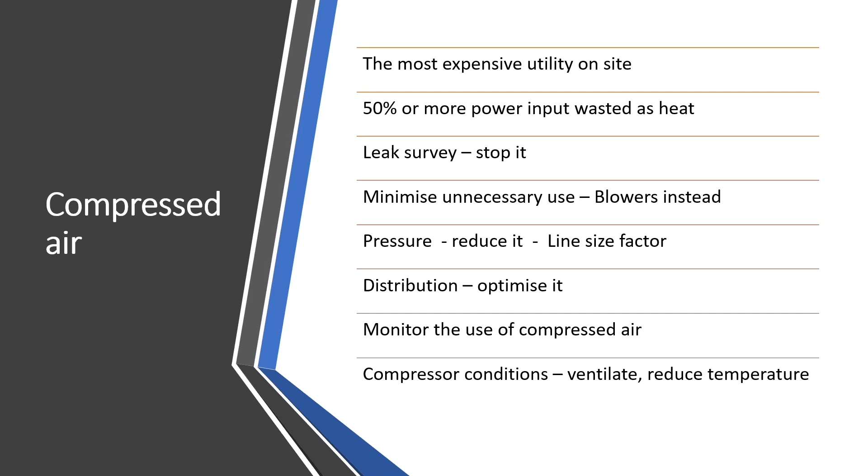And lastly on this compressor, and a little sort of overlooked fact, is that the volumetric efficiency of a compressor, at least positive displacement, so a screw or a piston compressor, will change dramatically with air temperature. So if you draw in air at high temperature, then the performance goes down, and 4 degrees C roughly will equate to about 1% reduction in performance. The waste heat from the compressor could, of course, be used to heat buildings.

And heat use in buildings for space heating and so on, there are some obvious things that you can do to save money. Reduce the temperature by 1, 2 degrees. A human cannot detect an air temperature change of less than 2 degrees. So you can safely go from 21 to 19 and nobody will be any the wiser. But that will save you a significant amount of fuel during the year. Insulate the building, the most obvious answer, and that's well known about.

But with a well-insulated building, it is a pointless exercise if the building is not well sealed. In other words, air infiltration or exfiltration can permeate the building, removing the heat that you've put into it. And sealing the building is as important now, if not more so, than insulating the building. And by that I mean window frames, door frames, plug sockets, pattress boxes, sealing around skirting, every conceivable gap or entry that allows air into the building.

Gas-fired boilers, now far more efficient than anything else. A premix modular gas condensing boiler can have a gross efficiency close on 95 or even greater than 95%. However, all of that is worthless unless you control the hours. And in controlling the hours, you really ought to be optimizing and compensating the control. Again, very easy with modern boilers.

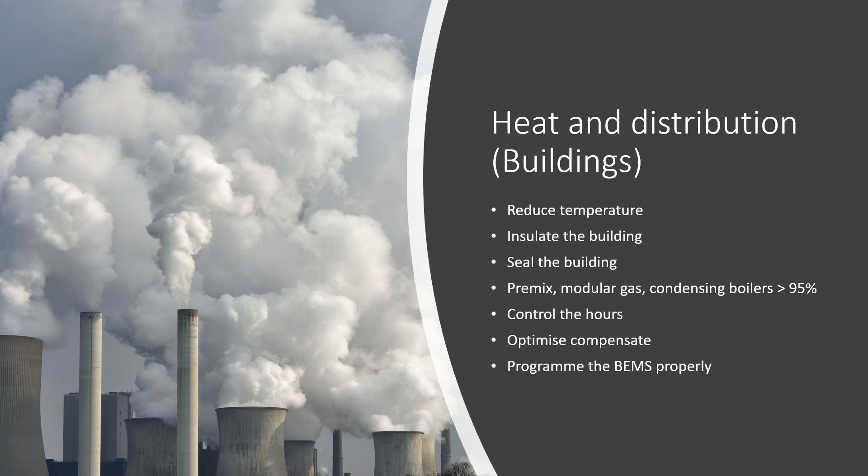Lastly, if you have a BEMS, a building energy management system, then please ensure that it's properly used. It's a very expensive time switch, but in most cases, that's what a BEMS simply is. It's used as a time switch when it can do so much more.

Looking briefly at heat and hot water and steam distribution, again, minimum temperature and pressure for generation, insulate the pipework and fittings. That's the often overlooked item with huge savings to be had there normally. Recover the condensate under all circumstances. If the condensate you feel is contaminated or has a high conductivity, then put it through a local plate heat exchanger, at least recover the heat from it. Obviously it's better if you can actually recover the liquid, the actual treated condensate.

Never generate hot water with steam. You're probably looking at an overall efficiency of about 50% there, when you can do it with direct fired gas boilers at something well over 90, as I said. Process heat: reduce, recover, reuse. There will be opportunities for process heat recovery in almost every circumstance. Compressor heat recovery is a good example. And where that's not possible, then we might be looking at integrated process heat recovery. And a good example of that is the use of an economizer in flue gas heat recovery.

Overall, with heating and heat distribution systems, things like insulating pipework and fittings have definitely got a payback of less than 1 year, and other more complex process heat recoveries are typically about 3 years. But generally speaking, there's somewhere between 15 and 20% savings potential in most heat distribution systems or process heating systems.

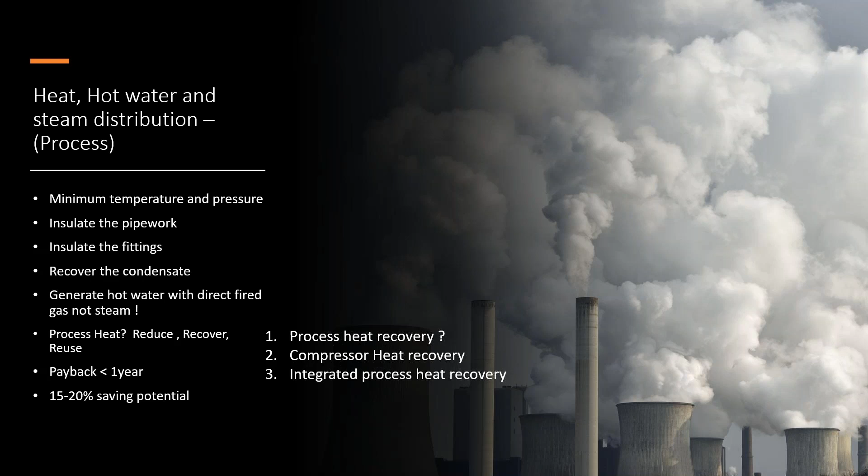Lighting, very quickly touch on that. There is an LED solution for every application. LED lighting does need careful design, and the critical bit here is getting the lux level at the work plane right. Lux is the lumens per meter squared at the work plane of, let's say, 0.9 meters above the floor.

You have to consider the lumen output, the ratio of the light output that is going to go to the place that you need it, the downward light output ratio, the color rendition. LEDs have very dichroic output unless the LEDs themselves are coated. So fruit and vegetables may look a very different color under an LED light than they do under a daylight fluorescent.

And the luminous intensity and the directionality. Now, luminous intensity: the LED has got a very small area but a very high luminous intensity. So if you look at an LED torch, for example, it looks incredibly bright, but actually when you shine it to see where you're going, you find it's about as much use as an old candle. And really, you've got to be very careful with LED design to get it right. And that's not something that every supplier understands.

Whatever you do, use an employer's risk assessment. Don't be having inappropriate lighting or color rendition or even control switching in things like switch rooms or stairwells, because if there's an accident, you'll get sued for not having established as an employer a safe system of work.

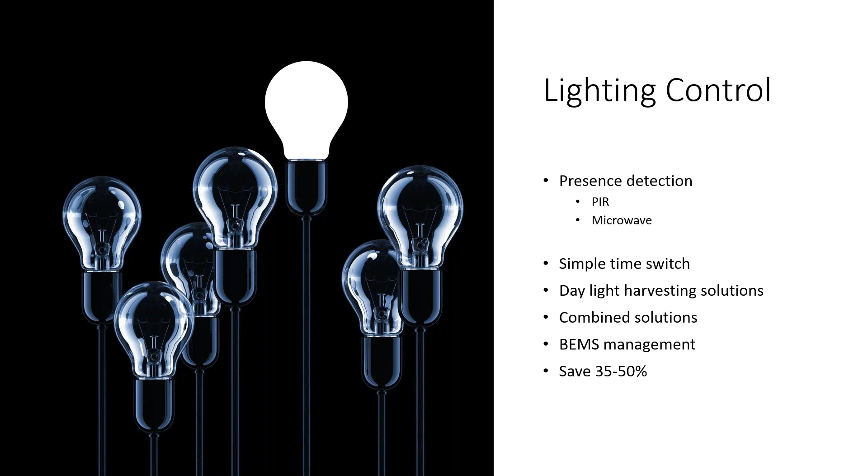And certainly where you have a BEM system, you can integrate all of those controls, or some of those controls at least, and the time switching into the BEMs to improve your lot. And overall, as I say, you should be able to make somewhere between 35 and 50% over typical lighting solutions.

Lastly, but not least, fuel efficiency in transport. Vehicle choice is important. Diesels are expensive to buy, expensive to maintain, but cheap to run, or relatively cheap to run, because they are very, very fuel efficient. Petrol vehicles less so: less to buy, less to maintain, but the MPG and the CO2 production is much higher.

Electrics and hybrids are extremely expensive to buy. They are less expensive to maintain if you don't take the cost of battery replacement into account, but you really must consider whether you're a leasing option or a buying out option completely, because the battery could be a very expensive limited life component of the car, up to 80% of the cost of the vehicle. So you need to do a very careful CapEx versus TOTEX assessment.

Driver training, though, is the key thing for all energy efficiency in transport. If you're operating something like a fleet of excavators or quarrying equipment, then an anti-idling policy; you'd be surprised how much fuel is consumed by idling vehicles. An anti-idling policy would be part of that driver training. Vehicle maintenance, of course, essential.

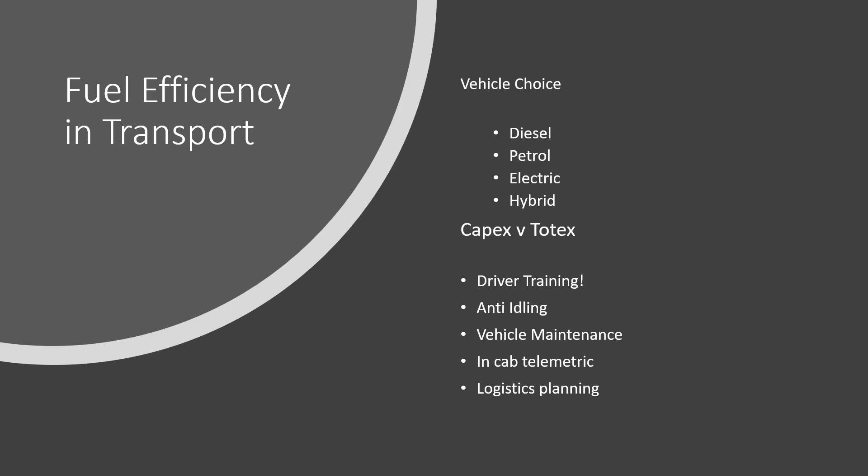The Freight Transport Association, with whom I used to work and lecture, would tell you that even a small trailer wheel misalignment will result in massive tire scrub and fuel consumption. And lastly on that, in-cab telemetry and logistics planning are a means of ensuring the best route match and the best load match. And I don't think there's a courier company in the UK now that would be working without in-cab telemetrics or logistics planning.

The driver training bit, that's the key bit. Reduced accidents, reduced insurance claims, improved MPG, reduced fuel costs, reduced maintenance costs, and potential savings of 7 to 15%. On a big fuel bill, that's a lot. Those figures are from the EST and from Logistics UK, which used to be the FTA. So that is what industry is experiencing in terms of saving.

So I had to rattle through that at high speed to cover off all the areas for everybody, but we can look at specific questions in the questions. But my conclusions would be that there are still significant opportunities for saving. Most businesses have the potential to look at about 20% saving, but you need to have concrete energy management plans in place, concrete policies, concrete drivers to achieve that.

And you can't save what you don't measure or you don't meter. So you must institute an M&T system, no matter how difficult. Get that MPG for your business and use a business KPI. And finally, on that, the most important thing is to use specialist support to get that to happen.

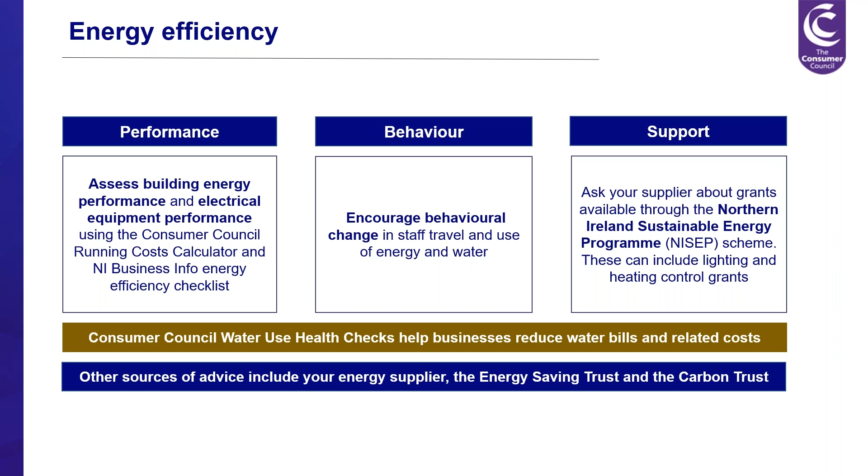Thank you very much, Dana. That was an excellent overview of what's available from the Consumer Council, and also a basic introduction to what companies and individuals can do to reduce their energy bills in the current environment.

Our next speaker is Jeff Crawford of our Operational Excellence team. Jeff will introduce us to what can be done to reduce, say, the movement of materials, movement of equipment in a factory or commercial setting, which in turn will reduce energy bills.

Thank you. Good morning, everybody. Welcome to this introductory session about applying lean thinking to run your business more efficiently. My name is Jeff Crawford, and I am an Operational Excellence coach within the Operational Excellence Solutions team in Invest Northern Ireland.

So the introduction to lean process improvement will give you an understanding of how lean thinking can be applied to make a company like yourselves more competitive. It will mainly focus on learning to see the 8 wastes of lean and applying some of those lean practices in your business to reduce those wastes. It will also look at practical ways of applying lean thinking to reduce that energy waste, and some of the lean tools that can be applied to reduce the energy consumption.

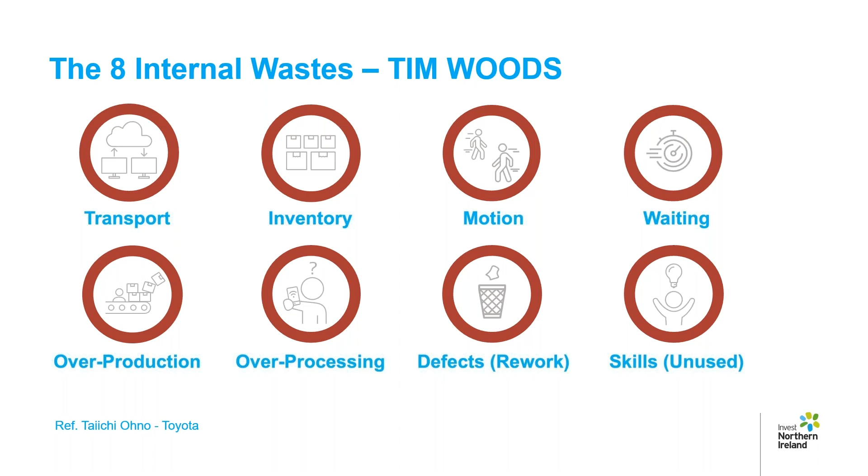Let's look at a practical approach then you could use to eliminate the waste in your process. First of all, understand the activities that are used in the process. Identify the resources involved in carrying out the process. Go and see for yourself what's really going on where the activity is taking place. Do involve those actually doing the process, as well as others that particularly have the power to change the process.

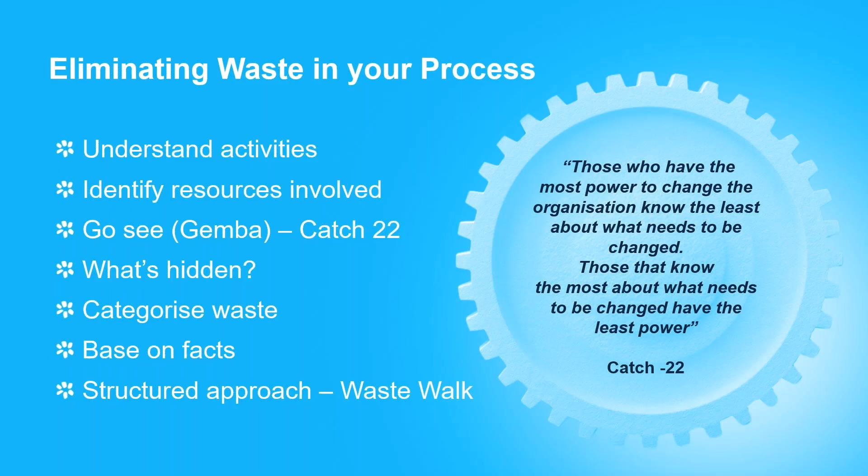Look particularly for the hidden waste using the TIM WOODS acronym I just explained, and categorize the wastes. Work with the facts and not the assumptions. A waste walk is a good structured approach for doing this. So here's an example of a simple waste walk template. Understanding the 8 wastes, i.e. TIM WOODS, will help you identify those wastes within your own work area.

First of all, categorize the wastes. So for example, a local wood processing business had breakdown issues with its wood profiling machine. Someone then had to report the fault, which is motion, and then wait for an engineer to fix the problem or the fault, which is waiting. Meanwhile, the paint shop are still waiting for a profiled part to paint so they can finish off the order.

Once you've done that, the next step is to define the priority of removing the waste based on the impact it's having on the process. That's going to be either high, medium, or low. The next step then is to help estimate the level of difficulty to eradicate the problem. Is it easy to do? Is it medium, or is it hard?

In this case, the company implemented TPM, Total Productive Maintenance, and reduced the downtime from an average of 2 hours per day to 2 hours a month. Output increased by 20% with no extra cost. From an energy point of view, think about the energy that is wasted during these breakdowns. The lighting for profiling and painting, heating in both areas, manual resource, operator, and the engineer. And by the way, the machines are still switched on, consuming energy, but not adding value.

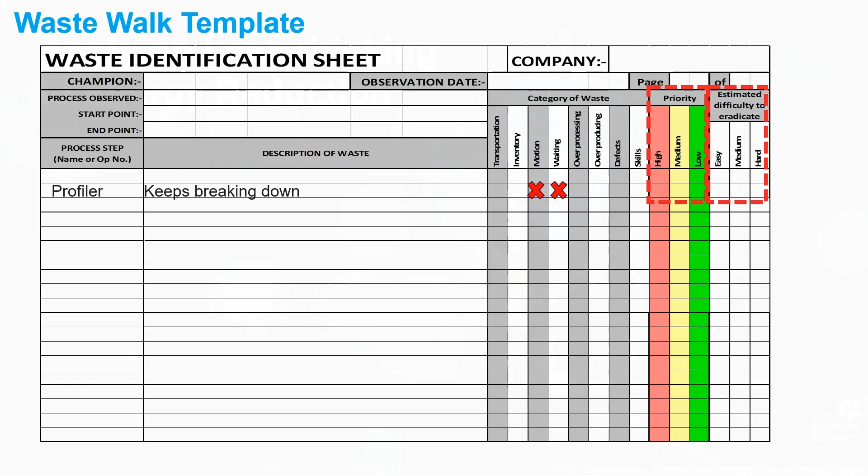So let's look at applying lean thinking to reduce specifically the amount of energy used in production and to increase the resource productivity. By eliminating waste, such as unnecessary processing and transportation, businesses also reduce the energy needed to power equipment, lighting, and cooling. Without explicit consideration of energy waste, however, lean may overlook significant opportunities to improve performance and reduce costs. Energy is a vital input to most production processes and value streams.

Energy wastes increase the costs of businesses. Energy wastes, however, are normally hidden in the 8 lean wastes as shown in the table. Waiting, for example, causes wasted energy from heating, cooling, and lighting during production downtime. By thinking explicitly about unnecessary energy use as another deadly waste, applying lean can significantly reduce costs and enhance competitiveness, while also achieving environmental performance goals.

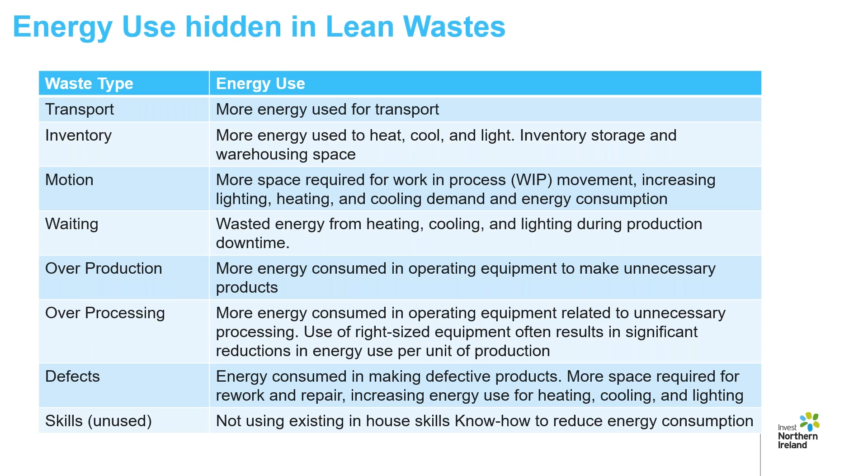Application of the correct lean tool technique to each waste as shown in the table can greatly reduce the energy consumption by reducing or eliminating those wastes. For example, applying 5S to a work area can significantly reduce motion, effort, and energy from that process. Installing a simple Kanban between stations, for example, can reduce overproduction and waiting, hence reducing energy used in those wastes.

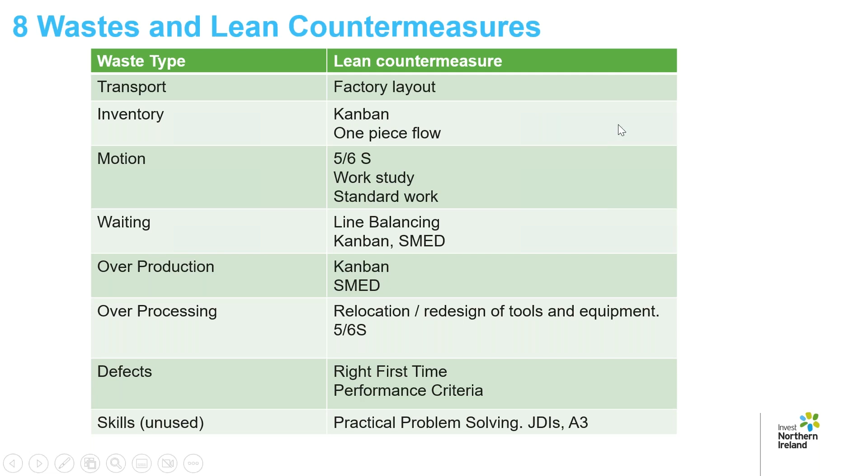While there are a great number of lean tools, here are 6 lean tools that can play a significant role in the reduction of energy consumption. These tools are Total Productive Maintenance, SMED, Single Minute Exchange of Die or a quick changeover, Visual Workplace. TPM, for example, is the systematic care and maintenance of equipment, which increases the life of machines and reduces the machining downtime. Therefore, with proper equipment and system maintenance, facilities can reduce manufacturing process defects and save an estimated 25% in energy cost.

A local company which I've just finished working with, by applying the single minute exchange of dies, were able to reduce their changeovers of their bottleneck profilers from 20 minutes to 10 minutes. This resulted in an increase in output by 10%, and a reduction of 50% of energy and labour wasted during this non-productive time.

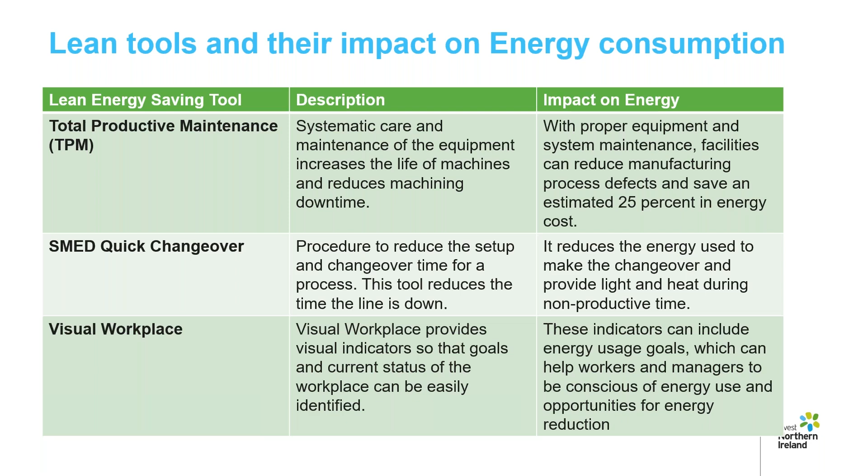There's also standard work, mistake proofing, and right-sized equipment. Standard work, for example, is a set of work procedures that establish the best and most reliable method of performing a task or operation. Work procedures maintained at each workstation, incorporating energy reduction best practices, can reduce the energy waste.

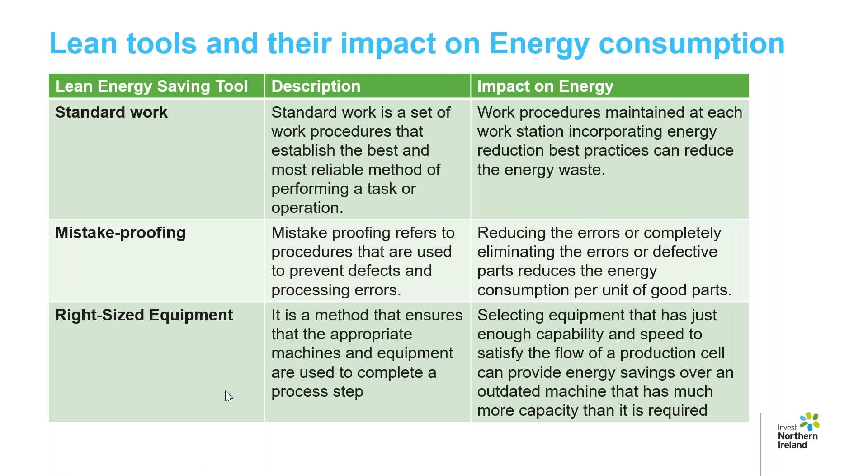There are a number of tools and concepts which are employed throughout the application of lean to increase the company's competitiveness. Obviously, we can't cover them all here today, but here's a list of some of those tools and principles, along with links to tutorials to give you a better understanding of what they are and how they can be applied to help a company be more productive.